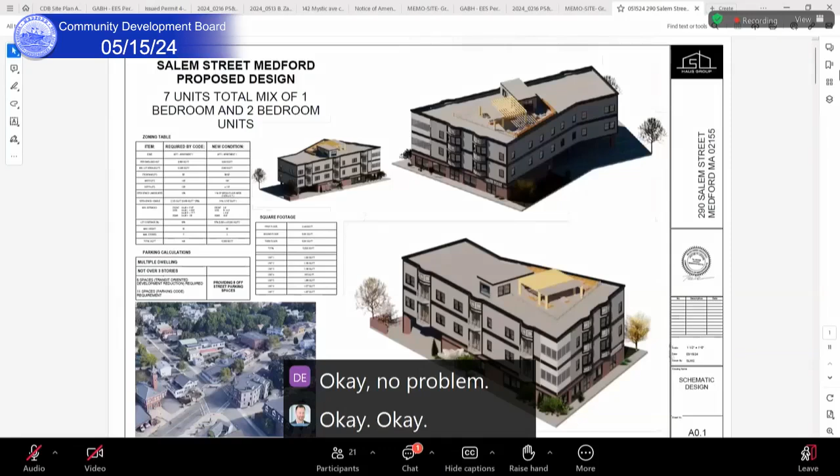Okay, thank you, Madam Chair and everybody. This is Jacob Levine, the architect from SL Haus Group. I apologize that I can't share the screen myself tonight. I'm kind of on the move, but I've been working digitally with the city to revise this drawing set and really specifically looking at the top left corner and studying how we could do a better job of grounding the building, along with just trying to unify the facades. So if you wouldn't mind just kind of starting to scroll down through the images, I can share what's been updated.

Starting really with the site plan has been updated. On the top left corner, you'll see a black 90-degree shape. Essentially, we're going to propose about a 4-foot barrier to shield the cars from Park Street, so those coming down Park Street won't have such an open view of the cars. That's represented in the top left corner adjacent to the sidewalk and the parking spots. Exactly. The parking has been revised a little bit to really fit underneath the building better in terms of the cars closest to the building. We also revised the footprint of the building, which we'll get into as we continue to move through this presentation.

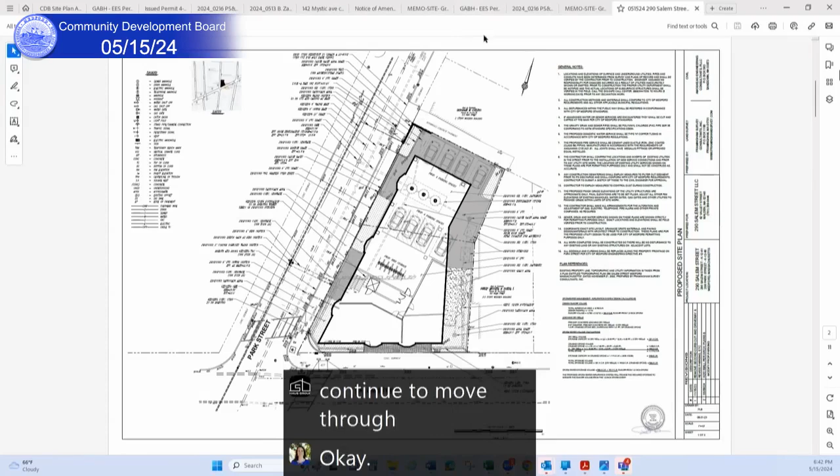So if you wouldn't mind just kind of going to the landscape slide. Yep.

On the landscape slide, you could see that corner in the top left to shield the parking. We improved the landscape on the Park Street side, and we pulled the wall, which you'll see in the architectural prints, to cover bike storage and those cars closest to the building. So the building has more of a portal now instead of being up on stilts in the background. All of our drawings now match in terms of site layout, site configuration, and landscape plan.

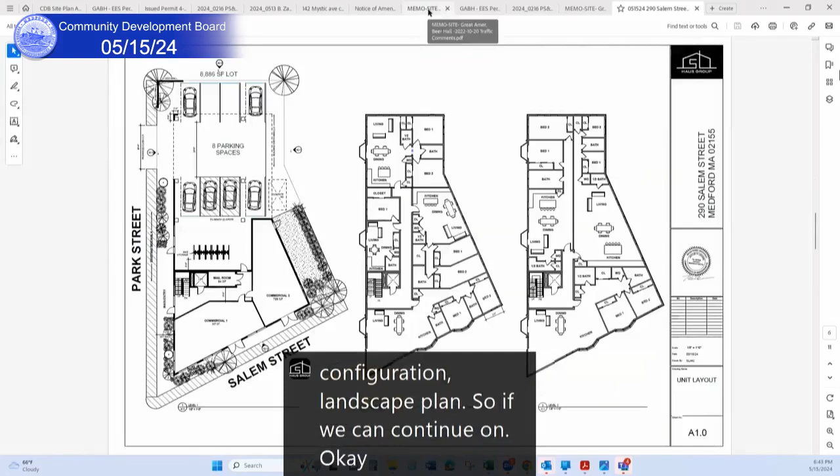Now you can see on the left side where we have the row of parking and the bike storage, that black line on the left with the door did not exist before. So we really did create more of an entry. And if you look at the car in the top left corner, there's a small 3x2 bite there. That's going to hide the column and do a better job at bringing the building down to scale, which I'll show you in the elevations and 3D images that are coming.

We could continue on. Nothing changed here.

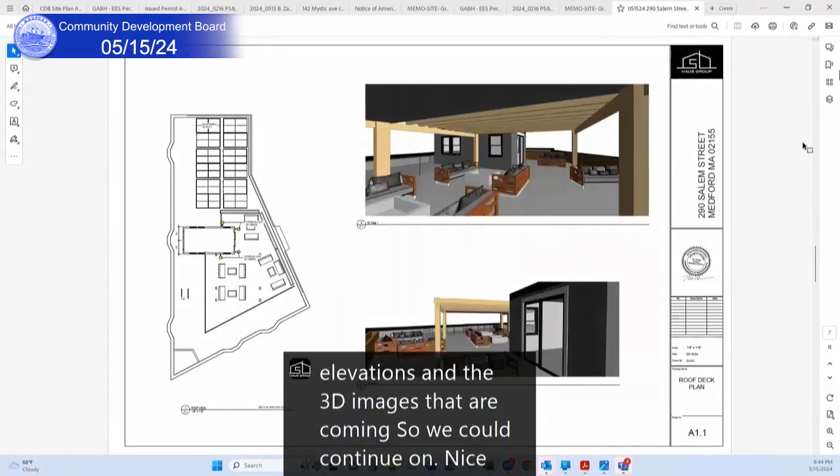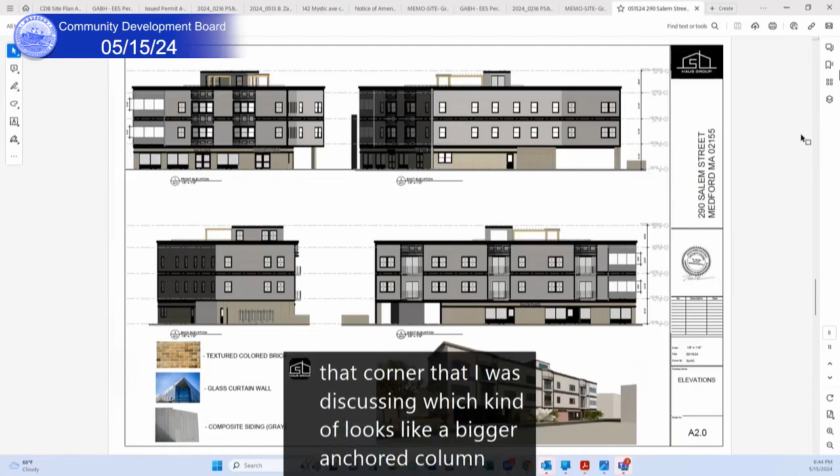On the elevations, we're looking now at the 3D image on the bottom right and the elevation bottom right. You can see how I brought the fascia board that was below the second floor down across the lowest floor to really create that portal. You can see the 4-foot brick or stone fence covering the parking, and the corner I was discussing, which looks like a bigger anchored column, and the upgraded wall to cover the bike storage as well. So that whole facade now covers most of the bike storage for security reasons, and the parking is mostly shielded coming down Park Street.

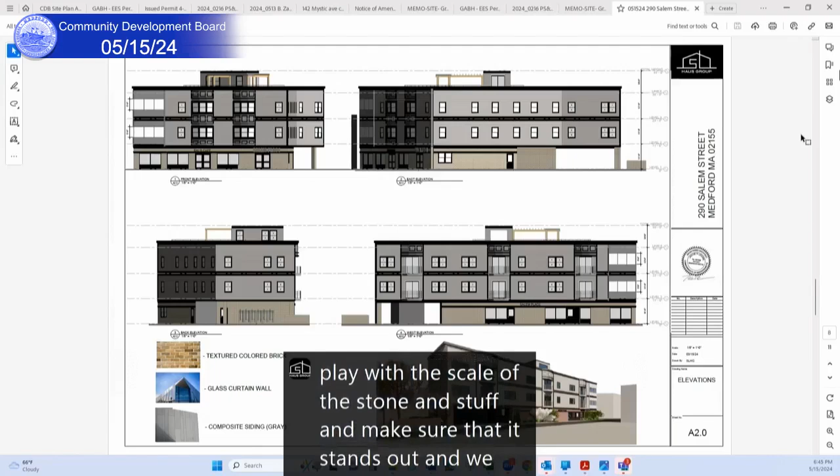I'm fairly confident we did a good job not blocking any views coming out. I think we want to play with the scale of the stone to make sure it stands out, and still have some sort of signage so pedestrians know what's to come.

If you could just go to my last slide. Oh, that one hasn't changed.

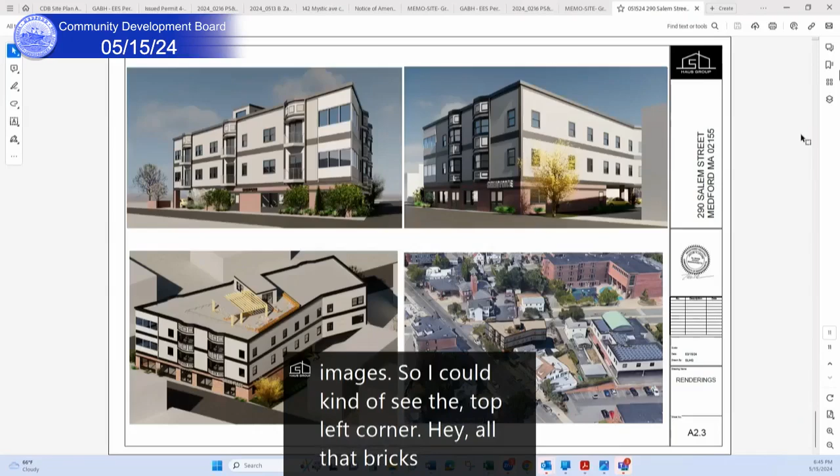Just wanted to show the 3D images. Now you can see the top left corner image - all of that brickscape and that double storefront in the back is all new. And you can see the column enclosure in that back left corner, and again our small 4-foot fence.

We're confident a driver would be able to see over that fence, have a safe pull out and still have a safe pull in, and really try to do a better job at what everyone's been asking for, which is the massing and the grounding to the site itself. So those are our upgrades.

The floor plans themselves didn't change. How the building sits on the site didn't change. We've just been working with the town on looking at that corner.

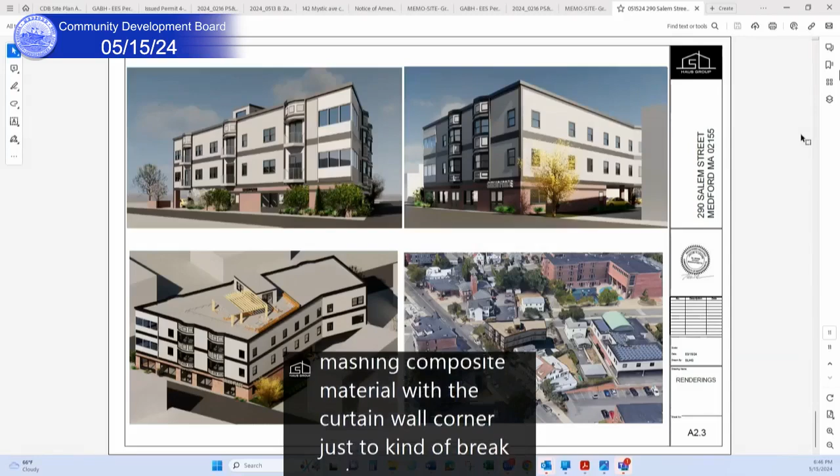You could also see in this top left corner shot, looking at maybe where the balconies are, we're doing a matching composite material with the curtain wall corner, just to break up that all-gray massing when it's all time. I wanted to point that out too - that was a good recommendation by the city, and I really appreciate everything.

Any questions anyone has, we'll be happy to answer.

Thank you very much, Jacob.

Before I open up to the board, I just want to commend you guys - the differences between the first plans and these plans are significant. It may not be 100% right, but it's also at the point where we can see how much you've worked with the city to move forward. And I, for one, can appreciate that, especially with that curtain wall corner that we were concerned with privacy on, and the whole idea of how an actual passerby will see the space. So I can appreciate that.

I will open it up to the board for any other questions or concerns.

No questions or concerns? No follow-up questions? Does the plan address overall concerns for the board?

Hey, Jackie, I have my hand up. Oh, sorry. Hi, Emily, Vice Chair Hedman.

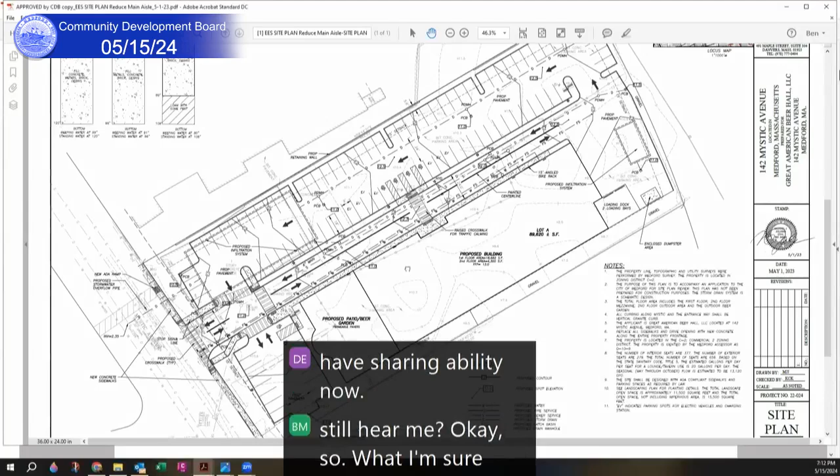Great, thank you. This is Ben Minix with Eaglebrook Engineering. Danielle, if I could please share my screen, I'd like to go over the two site plans. I believe you should have sharing ability now. There we go, can you still hear me? Yes. Okay, so what I'm showing here is the site plan previously approved.

I'll just show this quickly so you can see some comparison with the new proposal. So this is the building, which is still proposed in the same location, approximately 18,000 square foot footprint, with a proposed patio in this area here towards the south. And through the middle of the site with the driveway that was not approved is a two-way in and out driveway, and then parking along the north sideline of the property.

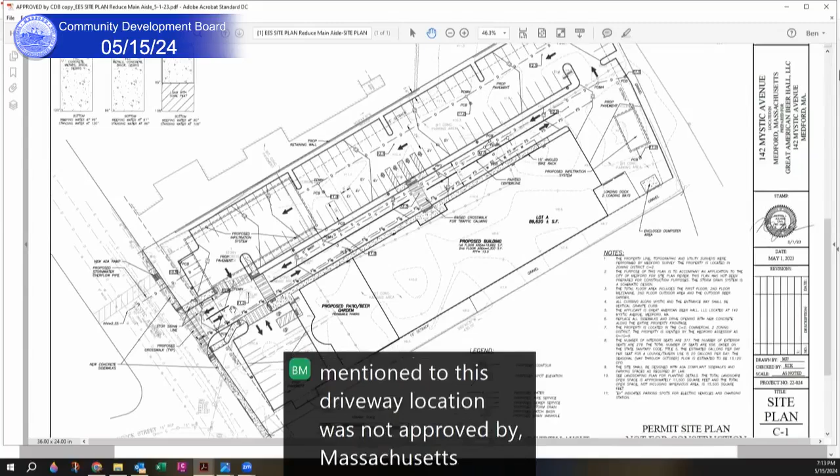As Danielle mentioned, this driveway location was not approved by Massachusetts Department of Transportation, so we had to go back to the drawing board with a location that DOT suggested and did finally approve. So I'll go to the current proposal, and if you have any questions, I can always jump back to this.

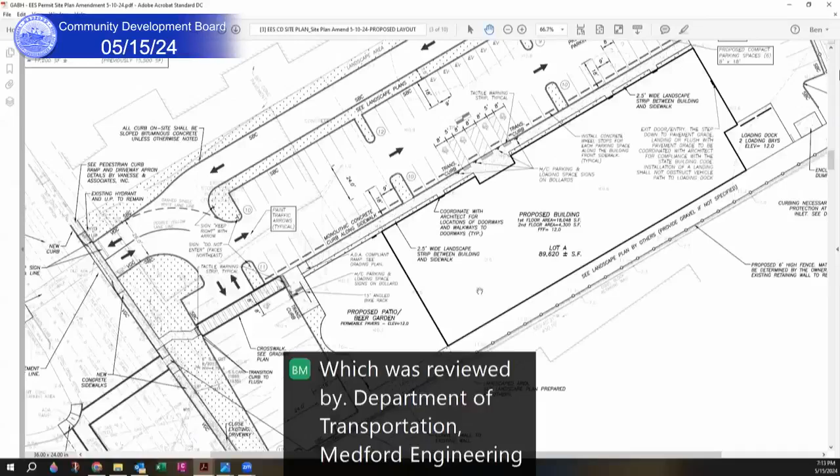This is the current proposal, reviewed by the Department of Transportation and Medford Engineering, and circulated among departments for agreement. The building remains in the same location. However, the driveway entrance, a two-way entrance and exit, has moved north on Mystic Avenue. There's one-way circulation through the site, with a 24-foot wide drive aisle, still one way, but with parking on both sides. Vehicles will exit around the north, drive south on the exit drive aisle, and exit at the driveway entrance.

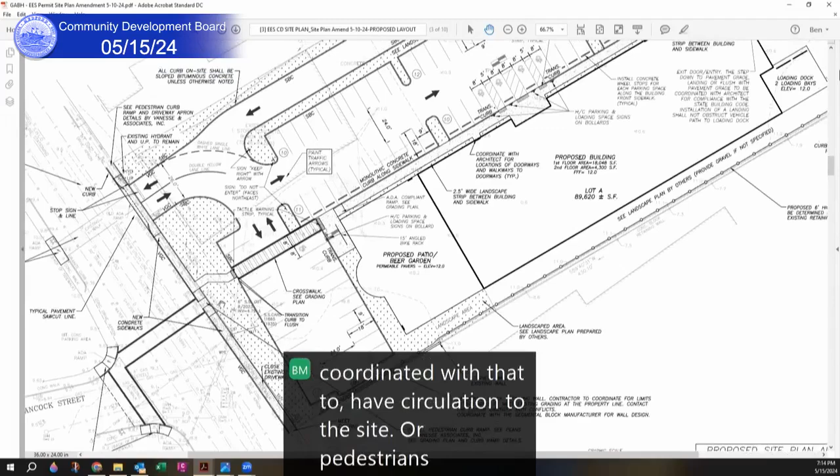DOT wanted crosswalks replaced and moved on Mystic Ave and across Hancock Street. We've coordinated with that to have circulation to the site for pedestrians from Mystic Ave and Hancock Street, so they can access via an ADA path to the building along the front and to the proposed patio area. We have additional landscaping with this proposal, approximately 1,100 square feet of additional landscaping and 1,700 square feet of open space, not including the open patio.

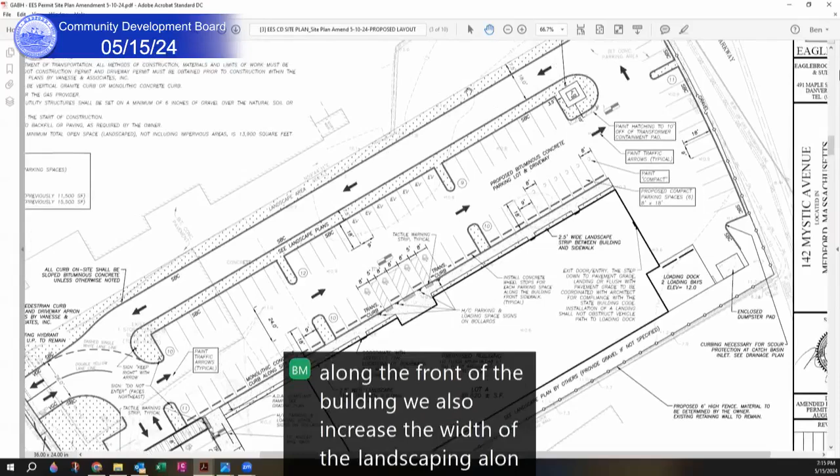In speaking with Danielle the last couple of weeks, it was suggested that we add a landscaped island here so there's no more than 20 parking spaces within a row along the front of the building. We also increased the width of the landscaping along the north side. Previously it was 5.6 feet of spacing; now we have 7.5 feet.

Mike or Brian, did I miss anything? Oh, that's great.

This is Mike Giuliano with Eaglebrook. The number of parking spaces, as far as what was previously approved versus what is currently proposed, is the same.

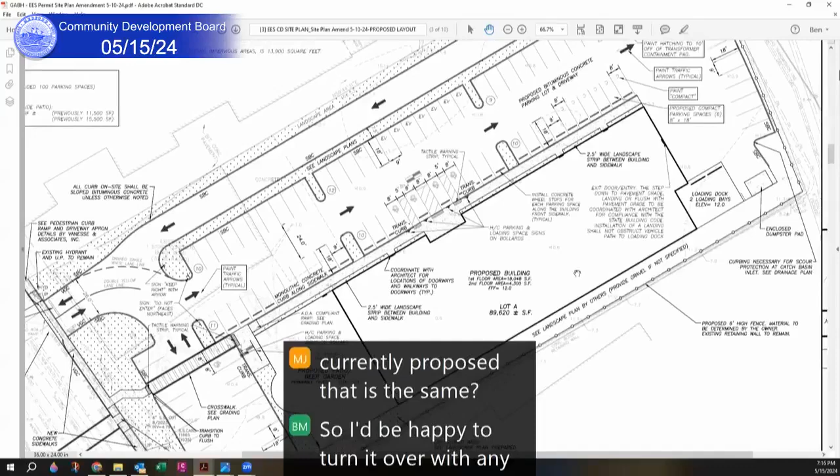I'd be happy to turn it over for any questions, or if you want to see additional sheets or anything.

Although we saw this a while ago, this came in so late that I have not wrapped my head around the differences. It would help me, just to speed this along, to have more time—not to act in haste. I don't want to do anything in haste, but I need to be able to wrap my head around this. Can you please compare the changes? I need to better understand what these changes are.

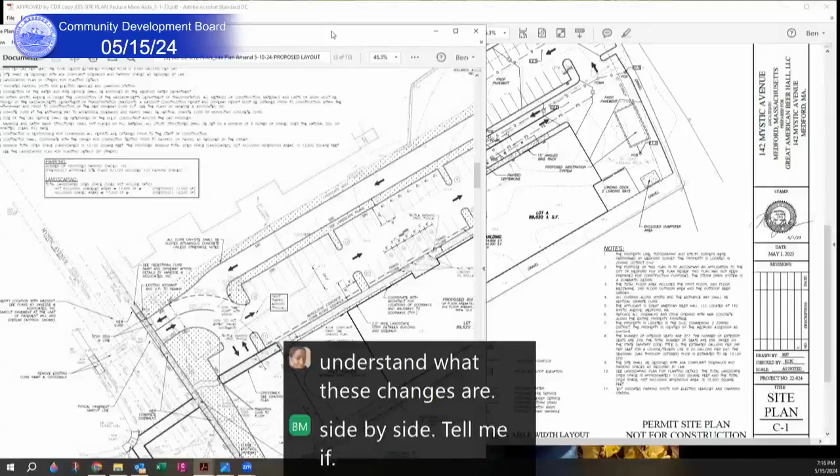Sure, if I put them side by side, tell me if you can see it or if you can't. Maybe it'll be too small, but I'll give it a shot. Are you able to see two site plans now? Yes.

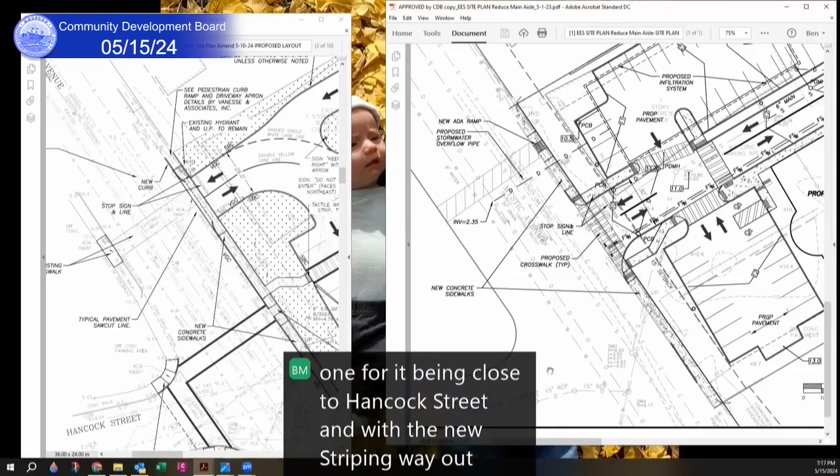We'll start with the driveway entrance, and you can see the location in reference to Hancock Street across the way. Previously the driveway was proposed a little closer to Hancock Street. DOT did not want that location, both for being closer to Hancock Street and because of the new striping layout and traffic controls going in on Mystic Ave. So the driveway was proposed farther north, farther away from Hancock Street.

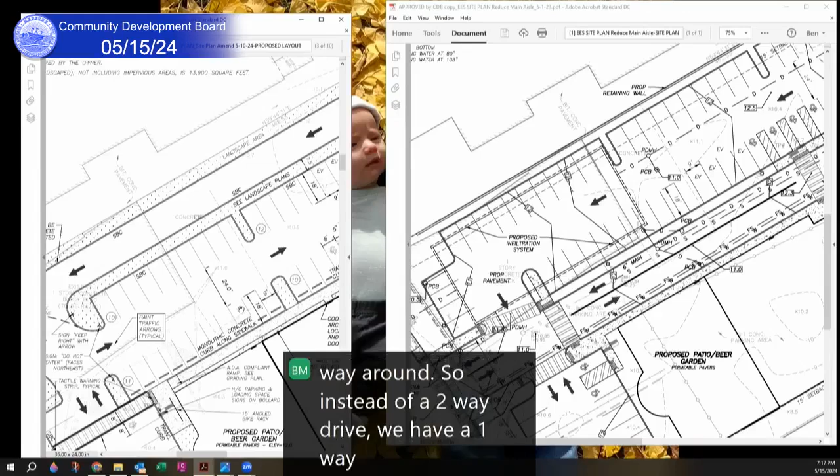Going into the site, the parking layout has almost flipped 180 degrees. Instead of parking opposite the drive aisle, now we're parking along the building with a one-way drive aisle all the way around. So instead of a two-way drive aisle, we have a one-way drive aisle all around the site, and we also provide greater width on the north sideline of the property. Those are the major changes. Again, 100 parking spaces for both the previous layout and the current one.

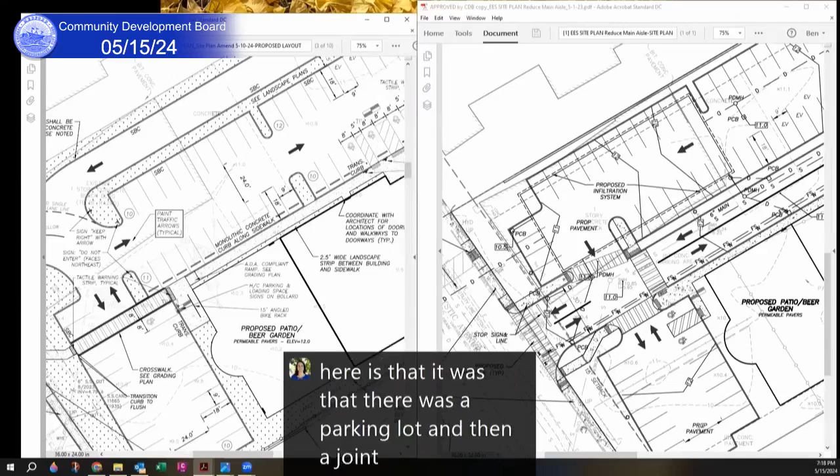Thank you. Director Hunt: I'm wondering, since Mr. Minix is presenting this from an engineering perspective, if I could explain from a layman's perspective what we're seeing here. There was a parking lot and then a drive aisle between the parking lot and the building, like a road, and everybody who parked had to cross that. The change in this layout now means that approximately half the spaces will actually be up against the building—not exactly, there'll be a sidewalk and a buffer—but everybody who parks on that side will not have to cross either the parking lot or any drive lanes. They can get out of their car and walk right up onto the sidewalk next to the building.

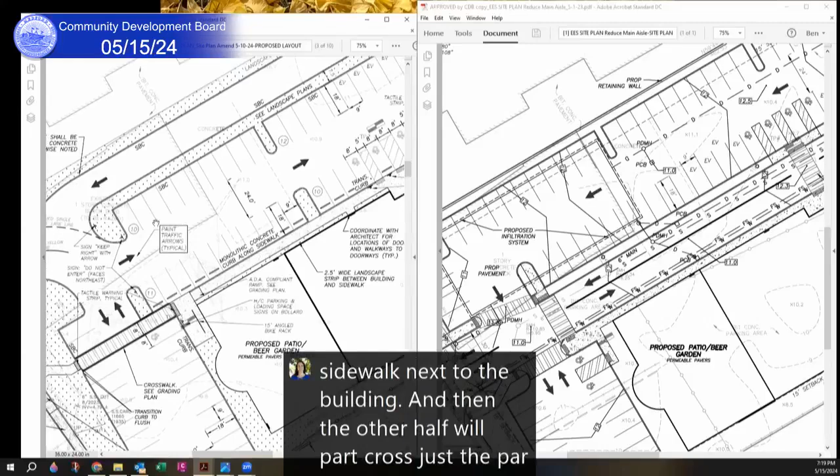The other half will cross just the parking lot. The through drive lane, where people are likely to drive faster since it's a straight shot through with no parking, is actually up against the edge of the property, and there's no reason for anybody to ever be walking over there because it's just a drive aisle. So we were looking at it in the office as this being actually safer and more pedestrian-friendly, because the parking lot is closer to the building and the one-way drive aisle is further away.

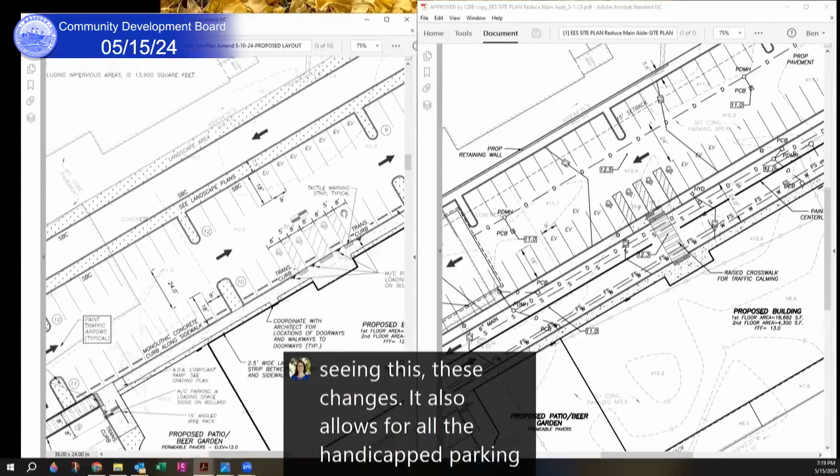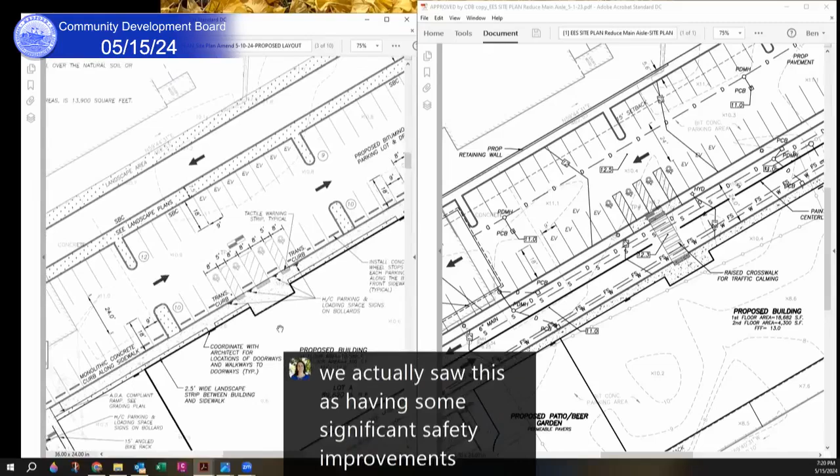I know I've put some opinion into that, but that's how we were seeing these changes. It also allows for all the handicap parking to be right up along the building area, so anybody having mobility issues can get out of their vehicles and right up onto the sidewalk. We saw this as having some significant safety improvements for the layout. DOT is kind of making them do this, and honestly I didn't like that DOT was making them change what we'd already approved, but once I saw their new layout, I was able to get over that.

Madam Chair, if I may, I just want to concur. When I first saw it, I thought, oh gosh, it changed, oh no. But then opening it up, I actually like this better.

The only bugger is that the permit MassDOT gave is restricting the left turn out. I don't know if that was mentioned yet. I'm trying to figure out egress and it's kind of hard. That's the one thing — what's the egress situation?

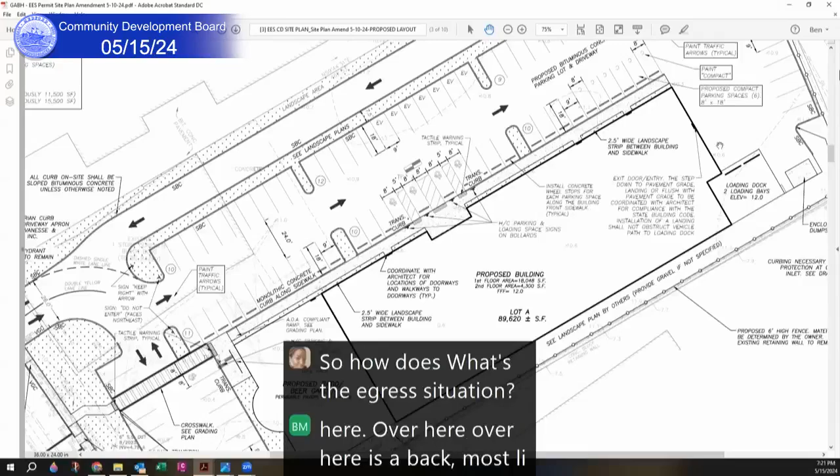So this is the main entrance to the building. We have another door here, and over here is a back, most likely worker entrance. There are also doors along the patio. We have a sidewalk going all along the building, with a sidewalk and bike rack, and ADA access through to the Mystic Ave sidewalk.

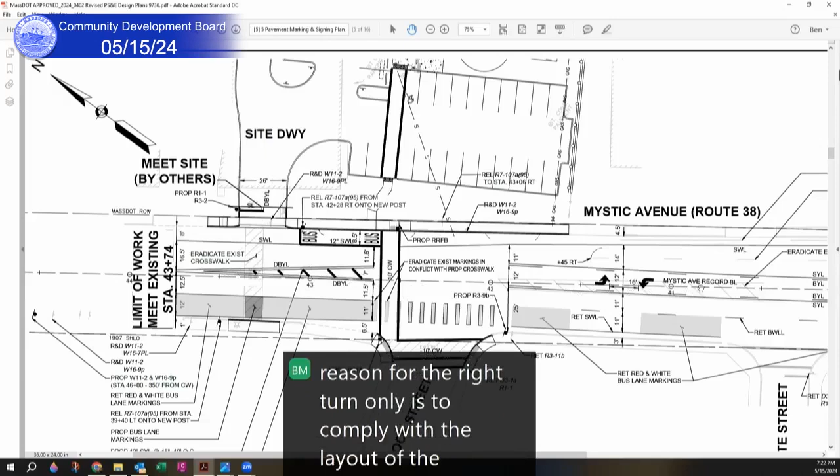As far as the right turn only out of here, I'll show the approved DOT plans. Along with the site improvements, DOT is requiring additional striping and paving on Mystic Ave. I believe the reason for the right turn only is to comply with the layout of the striping and traffic flow on Mystic Ave — they have a double yellow line and hatching there, so you'd have to take a right out of the site.

Not because it's in the same family, but Danielle, if I'm not mistaken, is Atlas built the same — right turn only, correct? When you come out, are you? I'll defer to Director Blake on what the permit access is for next door.

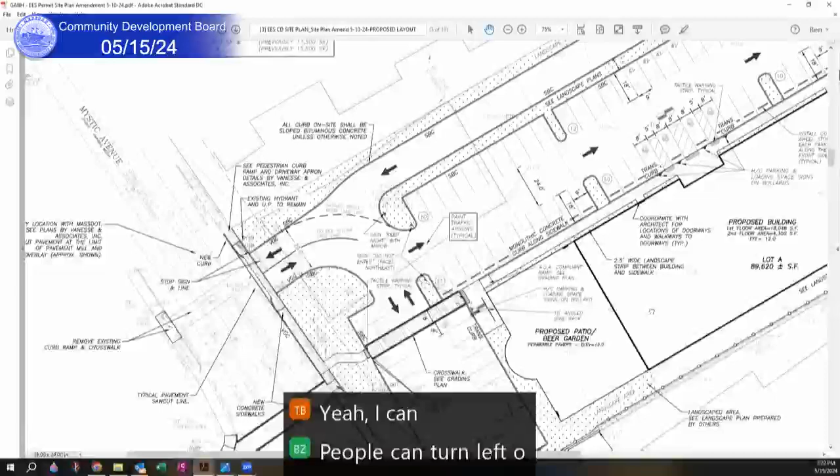People can turn left out of Atlas, yes. I can't recall if there's... I do want to point out, in addition to what Danielle said, the permit for MassDOT also restricts left turns in. So essentially it's only right out and only right in — that's the permit language. My take is that it's because of that striping and traffic pattern they have throughout the middle of Mystic Avenue.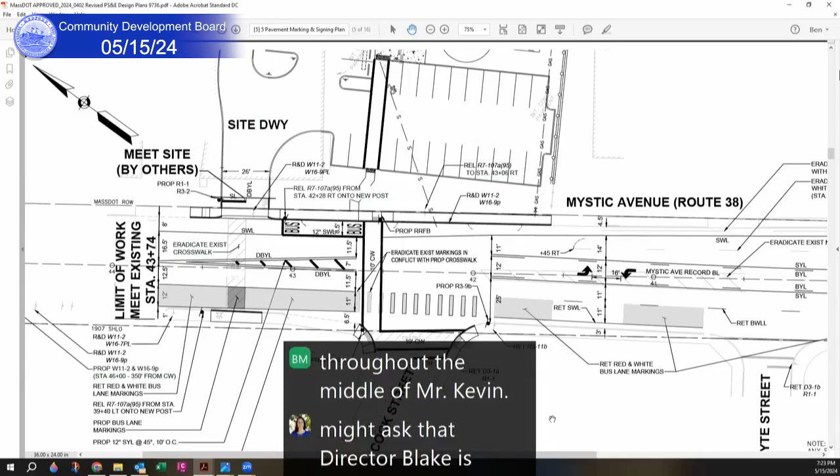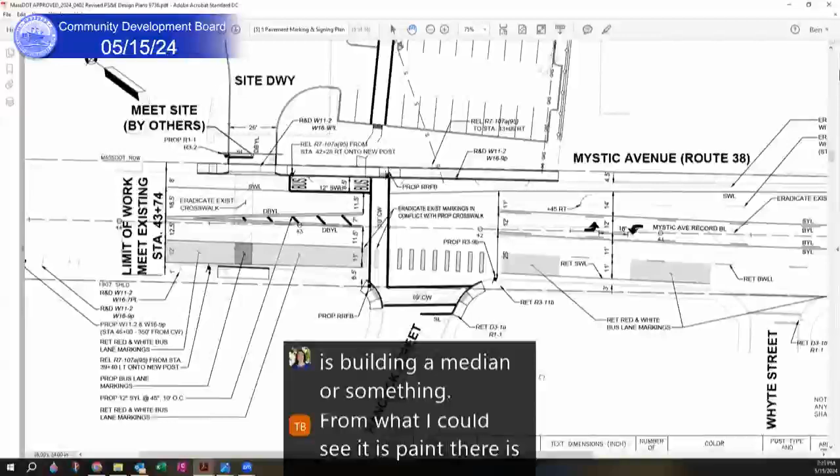Madam Chair, if I might ask Director Blake — is there any chance we're going to have any influence over that? From an economic development and city perspective, I don't like it, and we didn't even know this was happening in our office. I do know that at this time, it's all paint, right? It's not like anybody is building a median. From what I could see, it is paint. There is a sign on the property, R3-2, indicating no left turn out. It doesn't appear there's a no left turn in sign.

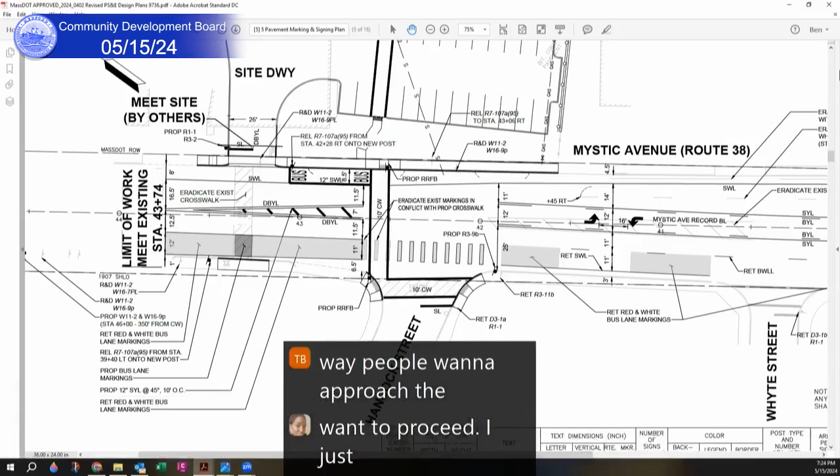I didn't know if we want to delve into the traffic piece here or continue with the site and the improvements shown on this plan first, however which way people want to approach that. Sorry, I got held up, I was looking at the transportation, so you can however you want to proceed. I just wanted to ask some clarifying questions I had to wrap my head around.

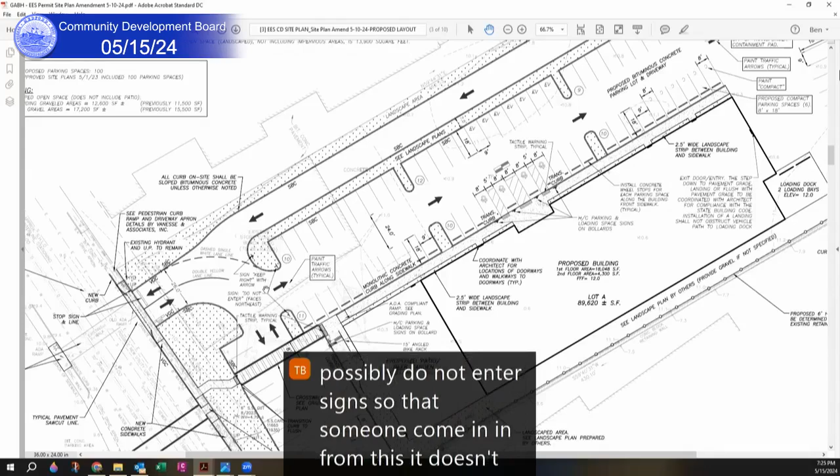Okay, so basically I tend to agree with Alicia and Danielle in my professional opinion for the city, for the site layout itself — it's equal or a little better than the previous, probably. So that's a good side effect of these changes. There were a couple of very minor things: at the exit where the two arrows are in and out to the dead end parking area, there should probably be a stop sign and stop line. And then at the exit from the one-way drive, same thing — stop line, stop sign, and possibly do not enter signs, so someone coming in from Mystic doesn't accidentally go left of the island, even though there is a keep right. Those are just minor signage things.

That makes sense — so then the people exiting would stop and kind of yield to anyone coming in from the main drive.

So that's for the site. Everything else Danielle and Alicia said, I agree with.

So off-site, we could probably go back to the MassDOT page. They likely added those restrictions. I can't speak for them, but it's probably a safety concern they had for the turning restrictions, but it does have impacts to the city for other things.

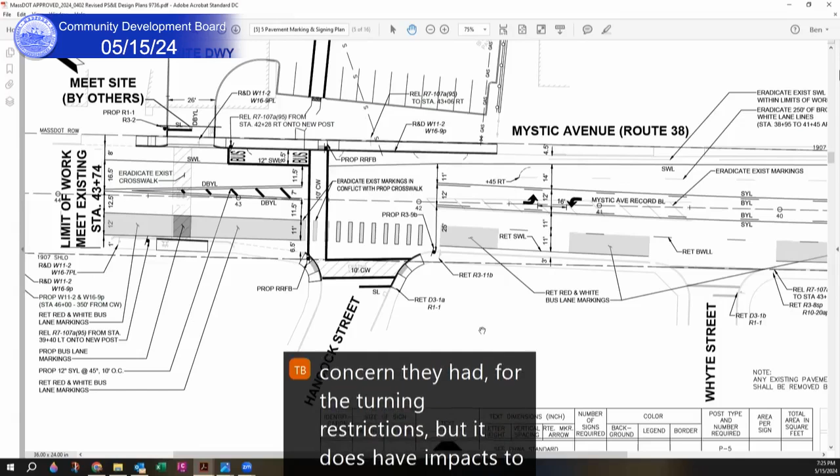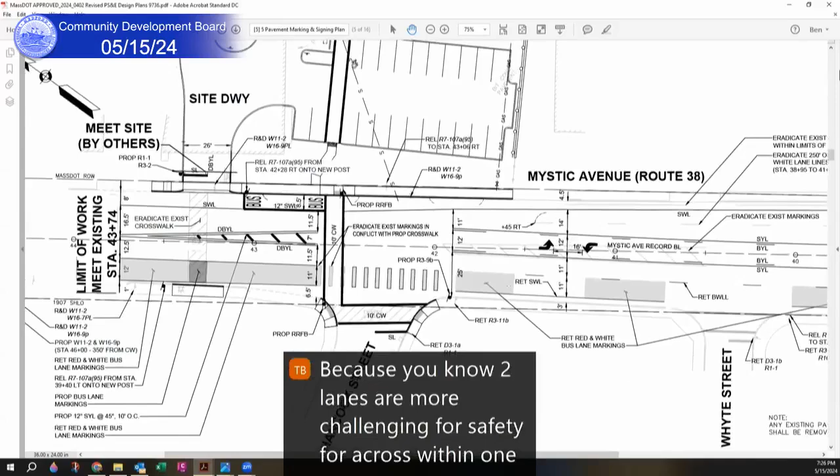Briefly, I'll talk about the plan shown here, all the markings. It looks like MassDOT agreed with my suggestion in one of the conditions to drop the second lane on Mystic Ave northbound before reaching Hancock Street. So by the time a vehicle reaches Hancock Street, especially the crosswalk, they're already in a single lane northbound instead of two, because two lanes are more challenging for safety for a crosswalk than one. We get more compliance with one lane for people yielding.

I'd note on this plan it does show the proposed RRFBs for the crosswalk, which was in my original condition recommendations but wasn't part of the original approval, but MassDOT apparently required that as well. So one on each side of the street, so that's good.

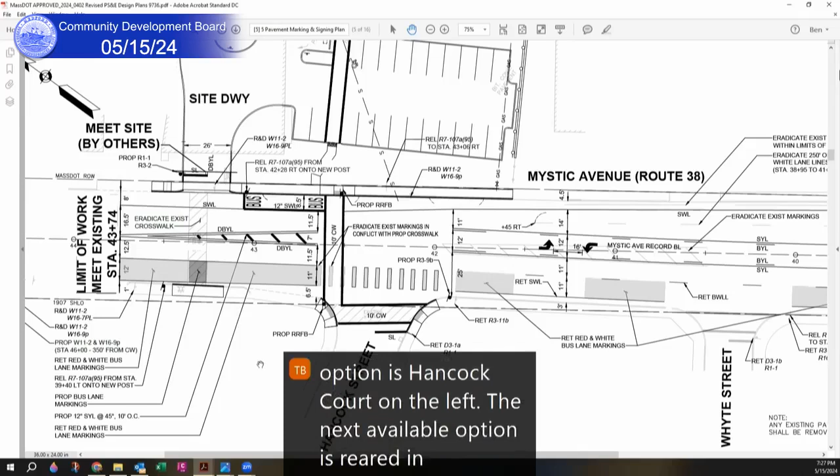So the downside is, because of those restrictions, it's pushing all the entries and exits to a particular side of Mystic Ave, north or south. When people exit the driveway, instead of taking a left if they're destined south toward Somerville or points south, they'll have to go right onto Mystic Ave North. The first available option is Hancock Court on the left. The next is Reardon Road on the right, to do a big jug handle and circle back south.

And the way directions work, because those two streets are private ways and don't typically offer that routing, directions will send people all the way up to Main Street where the police station is, to take a right onto 16 and do a jug handle back to Mystic Ave. That's the complication with this restriction. It really adds a lot of unnecessary vehicle miles and puts people into an area near the fire and police station, which is already heavily traveled.

Same thing coming southbound. If you can't take a left in and people obey that legally, they might come down from the north heading south on Mystic Ave and take a right on Hancock Court to hit Hancock Ave and Hancock Street, circle around and come out Hancock to go in the proper way. So it really changes the dynamics of the whole entry and exit to this site.

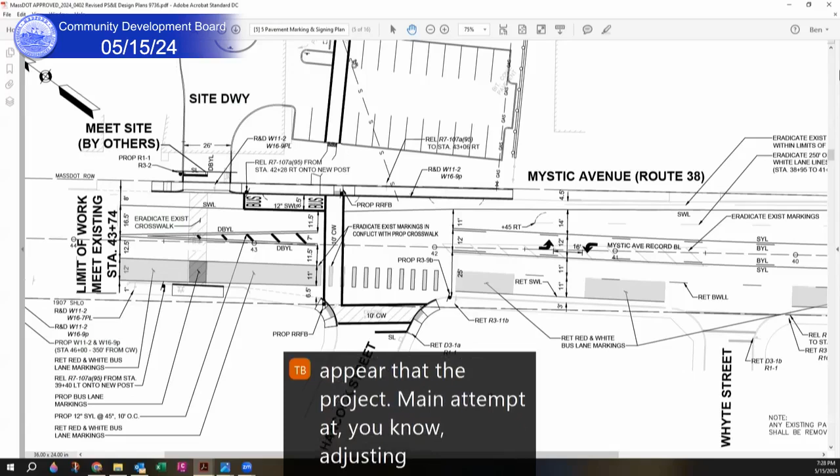It doesn't appear, from the information provided, that the project made an attempt to adjust the traffic study to explain what the impacts may be. So I'm trying to highlight what I think they could be. I think Hancock Court and Hancock Ave could see impacts from this restriction, and possibly Reardon Road. If not either of those, the Main Street corridor up near Main itself would see additional traffic it didn't necessarily need.

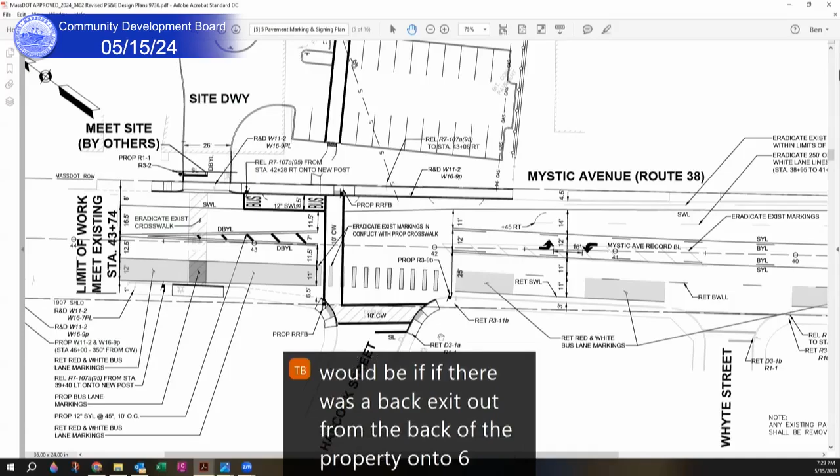One potential way to alleviate some of this would be if there was a back exit from the property onto Route 16, but that would require an access permit request to MassDOT. That would enable right-in, right-out so people exiting could turn right southbound, and people coming from the north could turn right in. That would help alleviate the issue, but I couldn't speak to the likelihood of that permit. Still, it's one way to potentially address the ability for people visiting the site to travel south when exiting, or arrive from the north more directly.

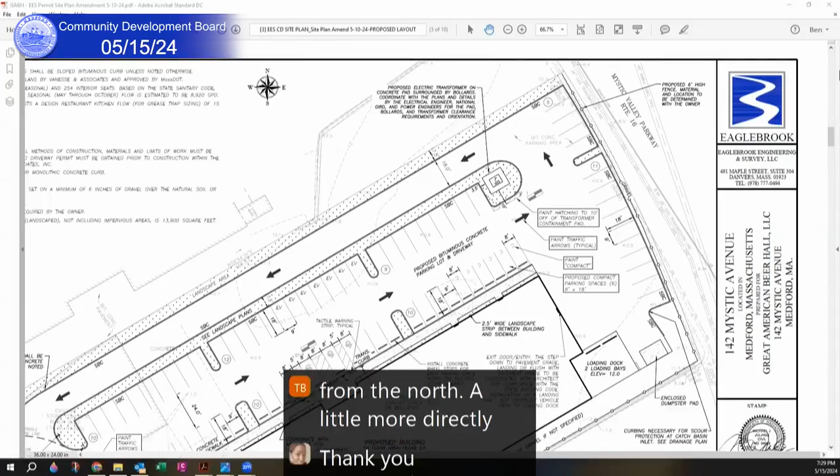Speaking with Danielle earlier, one concern I had with that option is that the back of Mystic Valley Parkway, Route 16, the way it merges with the exit on I-93, would put a lot of traffic spilling out at that traffic light coming onto Mystic Ave before you get there. It's just the way Mystic Valley Parkway is set up, period. It would introduce traffic to an already congested area that the DOT and we are already concerned about.

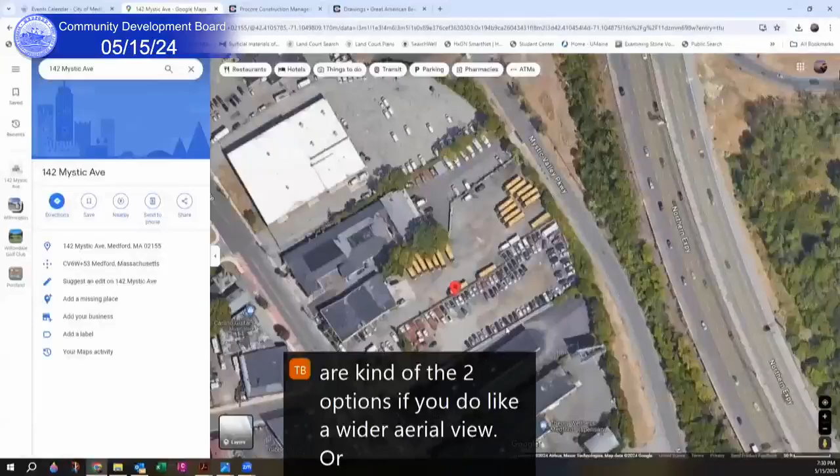But even without that driveway in the back, that's the way the directions will get someone north on Mystic Ave, turn right around the police station and come back south all the way down to that signal anyways. Or they'll circle left to Hancock Ave or left onto Main Street and come down through South Medford. So those are kind of the two options if you do a wider aerial view, like a 2,000-foot aerial view, you can see the options.

So if you go north up Mystic Ave, you could turn left onto Hancock Court, which is a private street, and then another left onto Hancock Ave, then a left onto Hancock Street would bring you back to where you would have been if you took a left out of the site.

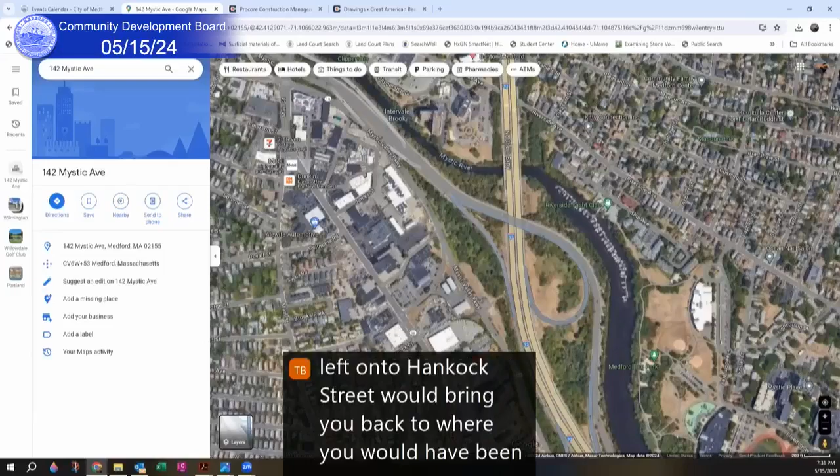And if you go all the way up and take a right on Reardon Road, which is essentially a private drive south of James Street, that would take you out to the backside of Mystic Valley Parkway. Or if you go up to the police station, same thing.

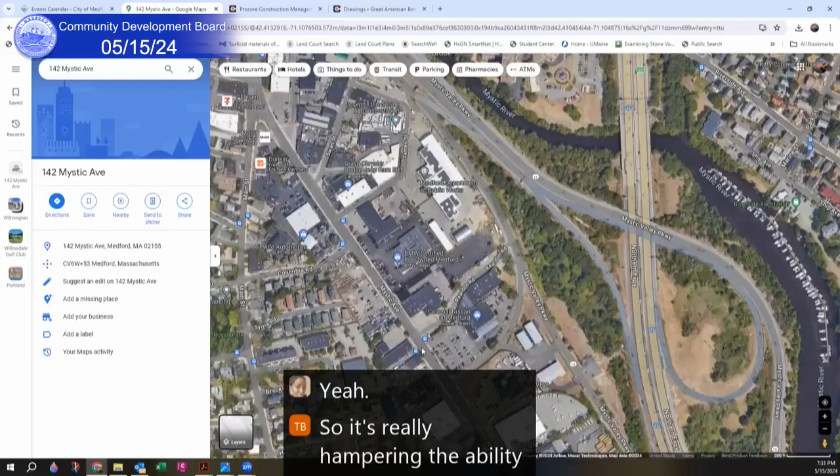So it's really hampering the ability of people to exit if they're destined south. And I think the traffic study mentioned that they thought 60% of the traffic was coming from and to the south. It's not the project's proposal, it was required of them. But we're just trying to talk about what the impacts may be to the community after the fact.

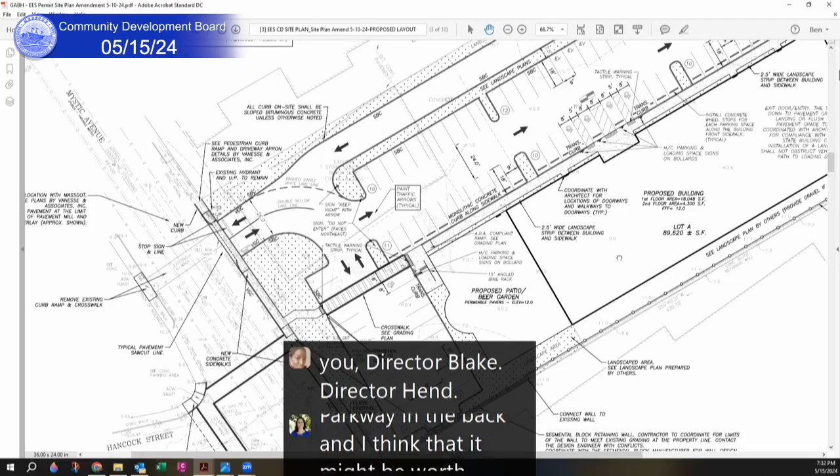I just wanted to add that I've been looking at these exits to the Mystic Valley Parkway in the back, and I think it might be worth it for some of the businesses to pursue in general, but I don't think it's a short-term solution. I don't think anybody's going to get a yes from DOT in months, it probably would take years. So I wouldn't try to even condition anything on it because of the lack of likelihood of it.

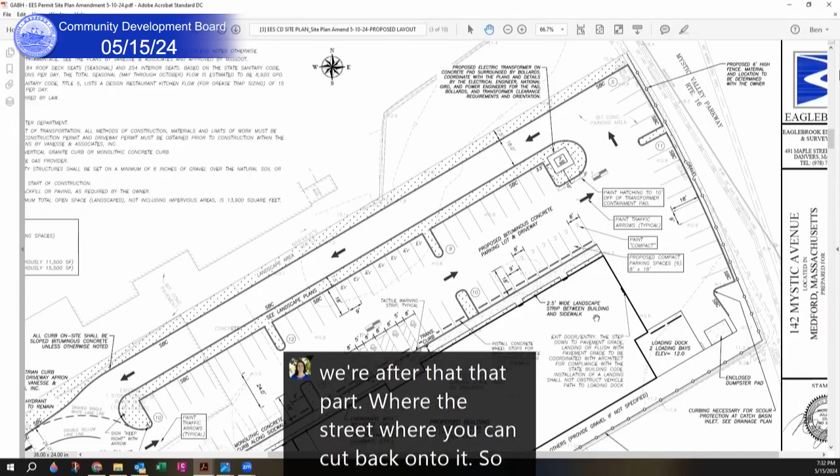But I do think it's a reasonable issue. I had thought before that there was another street that came back through onto Mystic Valley Parkway before Route 16, but you're right, we're past that part where the street lets you cut back onto it. So I just wanted to say that from the planning office we would support them and help them, but I don't think it's worth burdening a project with something so impossible, and it's not their fault that this was being pushed on them partway through construction.

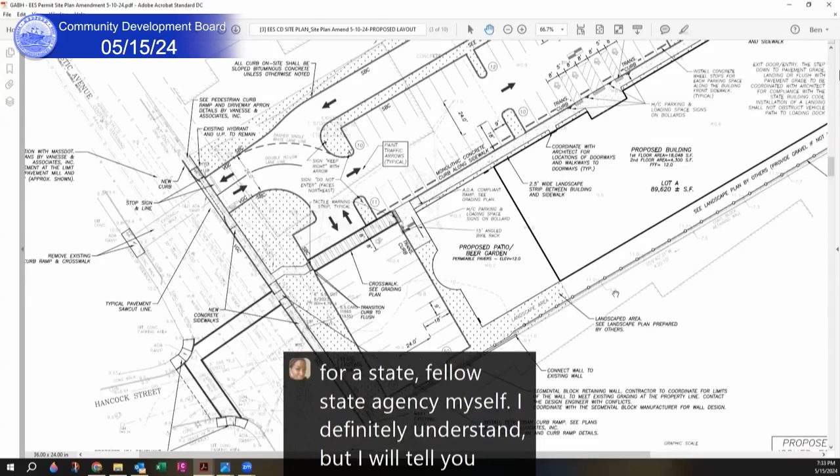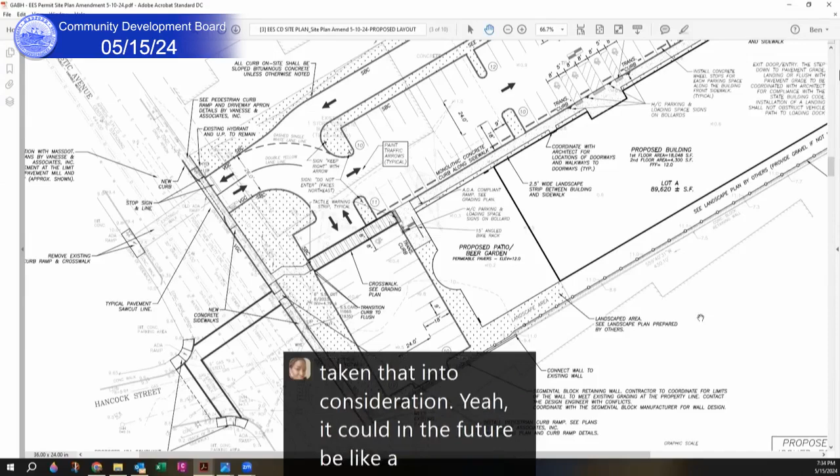And yeah, I appreciate that. I don't want to speak against the state because they're there for a reason, and working for a fellow state agency myself, I definitely understand. But I will tell you economically it could kill a project, unless the city is looking at a feasibility traffic study for the entire strip where others could actually come in and pay for the impacts. I can't even imagine what an access permit would do, not just adding cost but adding time to this project. I'm not sure how the proponent feels about that anyway, but in my experience, I know it could be cumbersome.

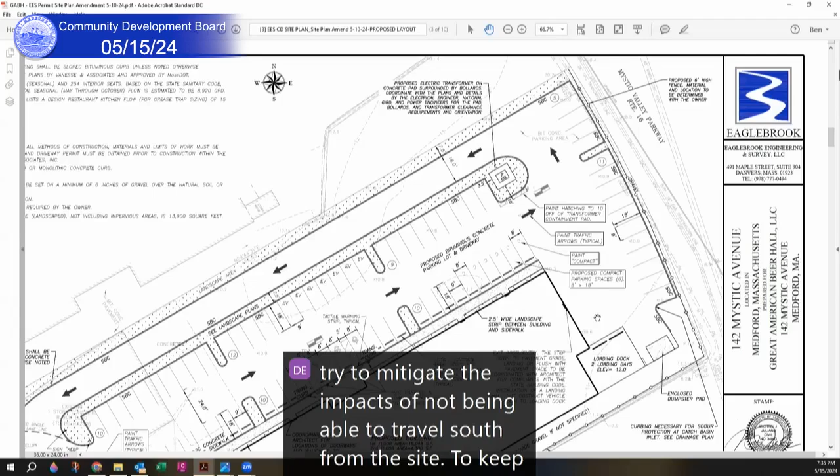To keep cars from speeding through, especially the Hancock Court area is one I'm concerned about - folks taking a right out and immediately banging a left into there and then flying through. Hancock Court is a private way, so I don't think we can do things unilaterally. There would have to be an agreement with those property owners if we wanted to put a speed hump in, or ask the applicant to put a speed hump in there to mitigate that.

I see Director Blake has his hand raised. Yeah, so just to go along with what Danielle was saying,

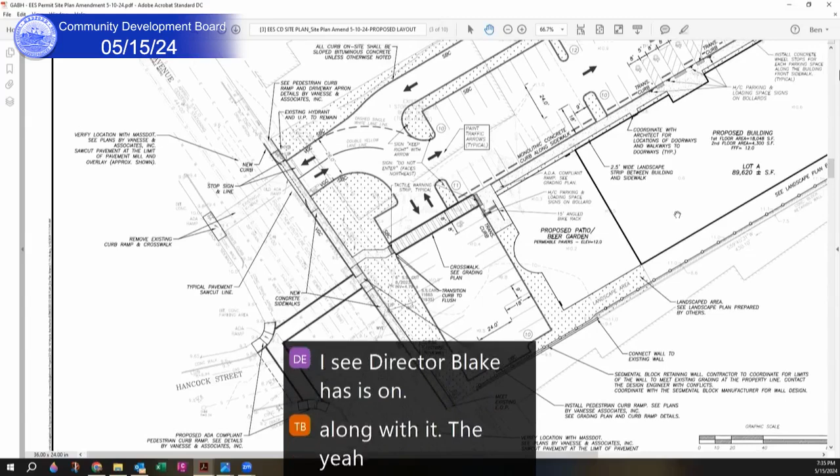there are ways to potentially mitigate negative impacts to Hancock Court or Redden Road or any of those private ways. Some of which could be a speed hump or something like that, or restricting access in the form of making those right-in, right-outs, whether it's with flex post or median or something like that. But again, because they're private ways, it would be subject to the private ways agreeing to those things. Could be determined at a later date or a certain value or something like that.

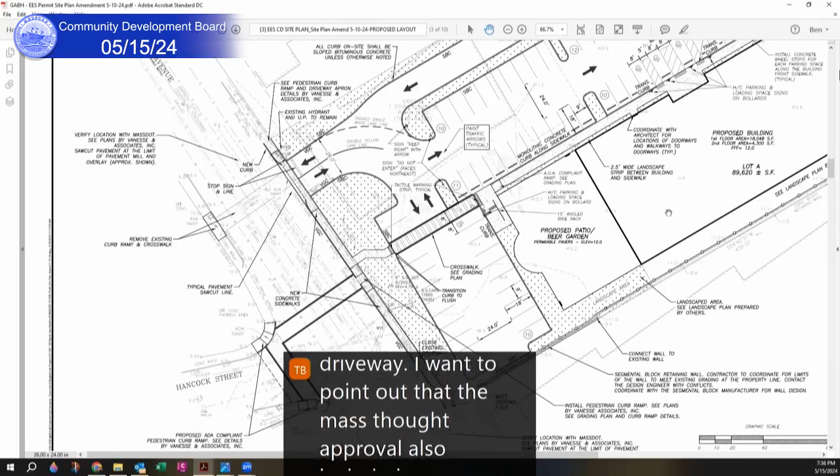But those do seem like the most immediate options for people to exit or enter from the way that's restricted from the driveway. I want to point out that the MassDOT approval also included retiming of the traffic signal at Harvard Street and Mystic Ave and Route 16, which is the one we were saying is congested. So obviously by MassDOT requiring them to retime that, they already think that signal system needs work, and the state and the city have already discussed those in the past unrelated to projects, how it needs some work down there.

But whether this project is, either way, this project would send traffic through at least that portion of that signal, because either they're traveling down Mystic Ave if the restriction wasn't in place and they'd go through that signal, or they'd go Mystic Valley Parkway in the backside and still end up going through that signal. But where the off ramp and 16 meet is definitely problematic.

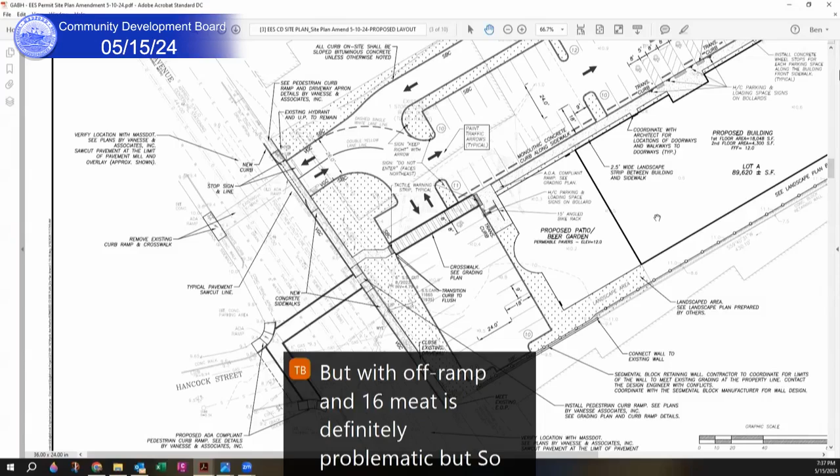It would be nice to try to come up with some way to mitigate the negative impacts to, say, Hancock Court and Hancock Ave, and possibly Redden Road too. But if we did so and those were successful, then the option leaving would go all the way back up to the police station area. So it's just a challenging situation that we're all put in right now with this. But we want it to make it work and be successful, without being an impact.

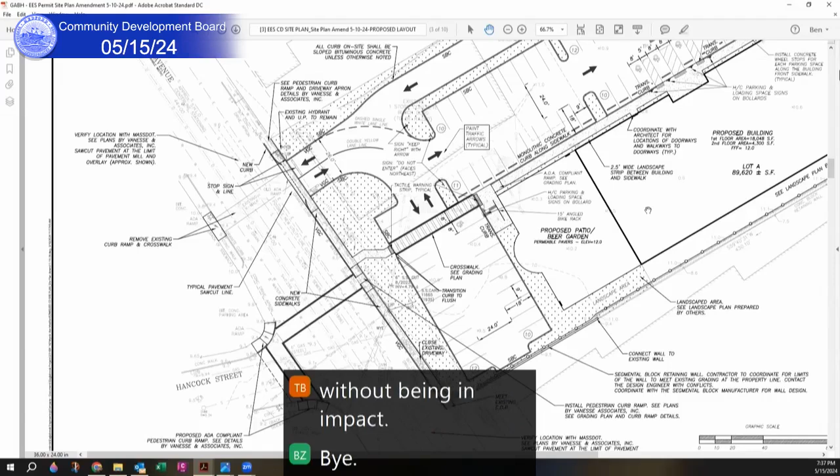If I may, I don't mind applying for access out the back, but I just don't want it to take it as a condition to hold me up on my CO. We're, I'd say, 70 to 75% through the project right now. We're set to open in July. But that was something I will do. It's just after just going through the Mass DOT process, it's timely.

No, Mr. Zarther, I myself, as just one board member, I wouldn't be comfortable conditioning that. Yeah, thank you.

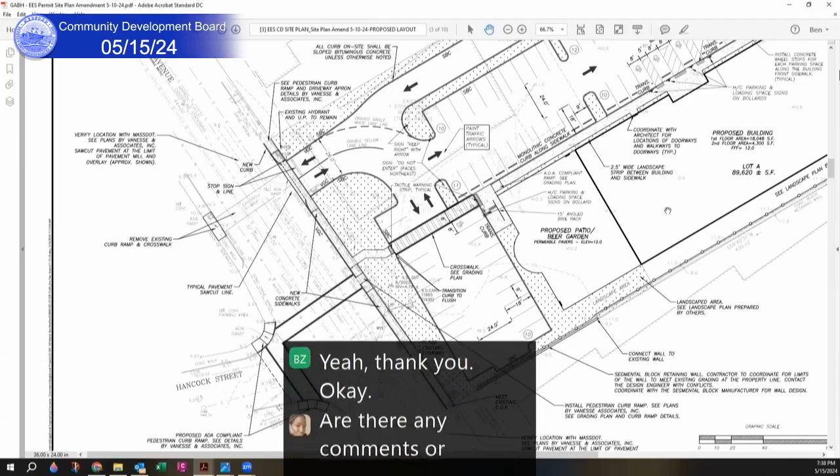Are there any comments or concerns from the board? Peter Cowles? Yes, I just wanted to kind of summarize the situation and give kind of what I saw as the short and long term.

I think it's still worth it in the long term to pursue the access permit on Route 1A, but I don't think that's, like we said, something to condition the whole project on at this moment. As Mr. Zarther pointed out, they're almost done with the project.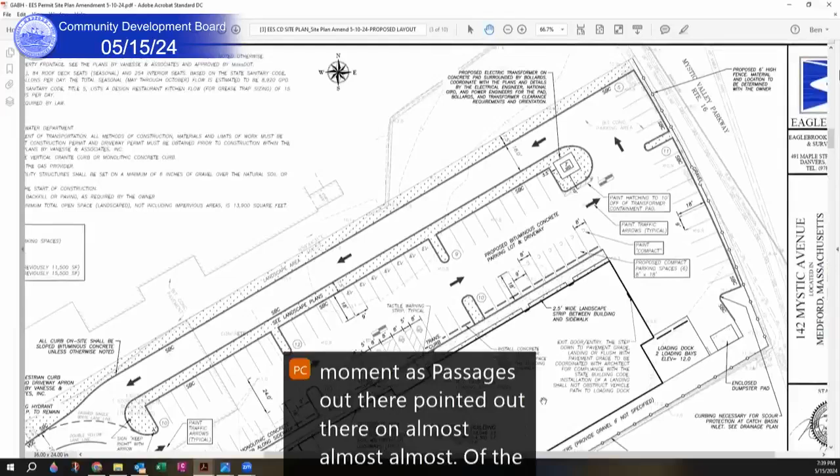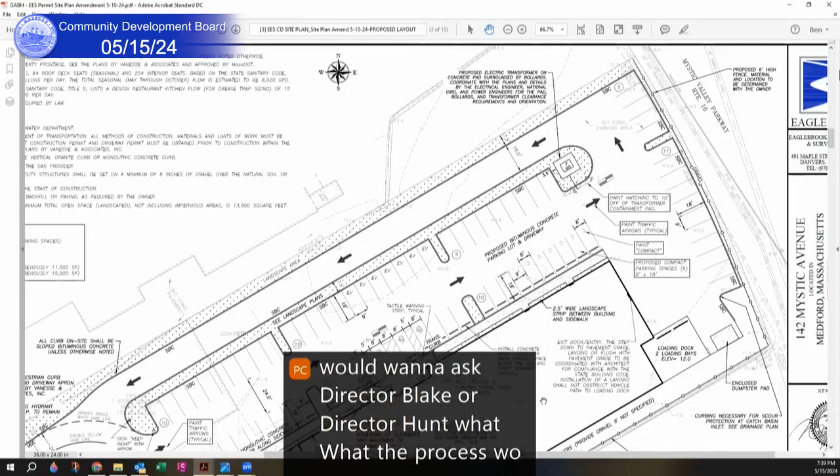So I do think in the short term, some kind of attempt to seek to do traffic calming on the side streets where traffic would be diverted is probably the best available mitigation in the short term. And I would want to ask Director Blake or Director Hunt what the process would be, because those are private ways, to get something in there.

It's a very good question. So there might be a way on public streets to address the Hancock issue, but it wouldn't necessarily be on Hancock Court itself. You could potentially put traffic calming in Hancock Ave, which Hancock Court, once you go down there, leads to Hancock Ave in both directions. So you could put a traffic calming device on a public street in either direction on Hancock Ave, potentially. That would be within the city's control.

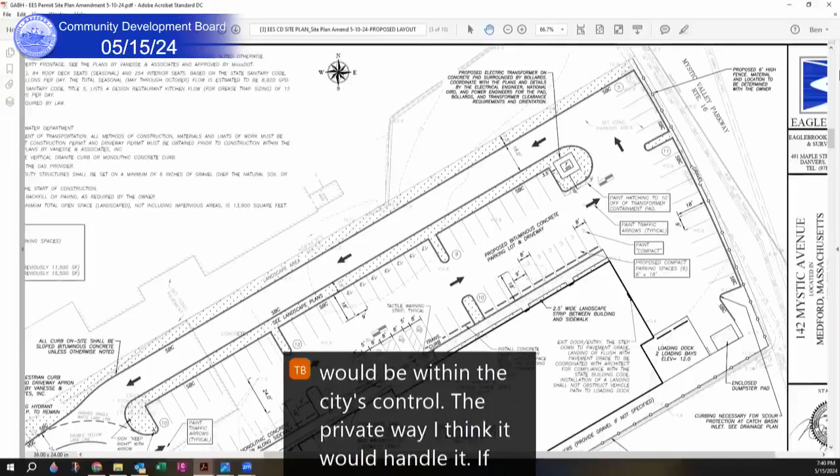The private way, I think it would handle it if there was a recommendation that was associated with this project this evening or some other time. You could condition something in the form of some traffic calming element subject to the approval of the rightful owners of the private way. Almost like a lot of times we suggest traffic calming on state roads, but we say subject to MassDOT. So it's subject to whoever has rights to make that decision on that road.

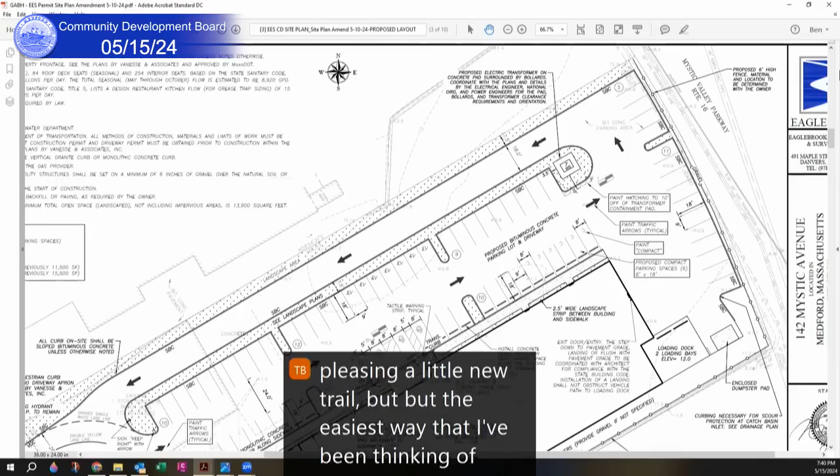It'll be kind of blazing a little new trail, but the easiest way I've been thinking of handling this would be in terms of time. I am cognizant of the whole discussion about the time of the project and delays. In my experience, being on the private or public side of previous developments, even though sometimes it's not preferred, sometimes it is preferred, money doesn't take any time. Offering money for a solution, set aside for that purpose to be determined at a later date, means you're not tied to a specific thing that has to be done before you open. So that's one way to handle it.

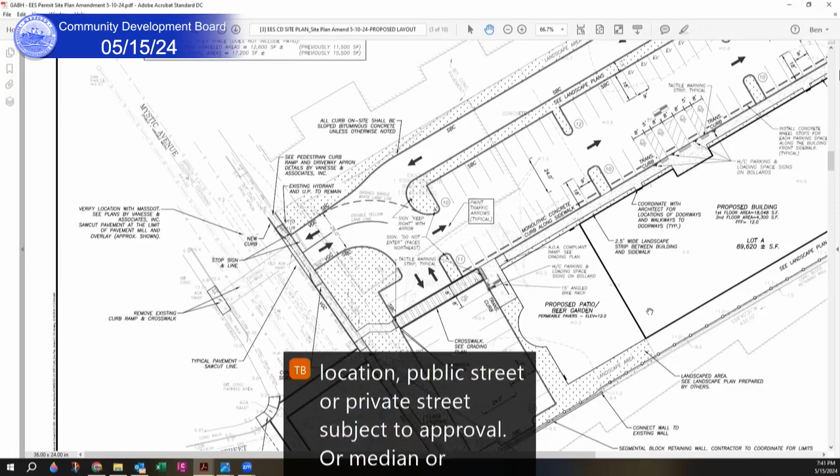But you could prescribe speed humps at this location, public street or private street, subject to approval, or a median or turn restriction at those locations, subject to their approval, or money in lieu of those types of improvements, some value. But yeah, that's the way I would go about doing it.

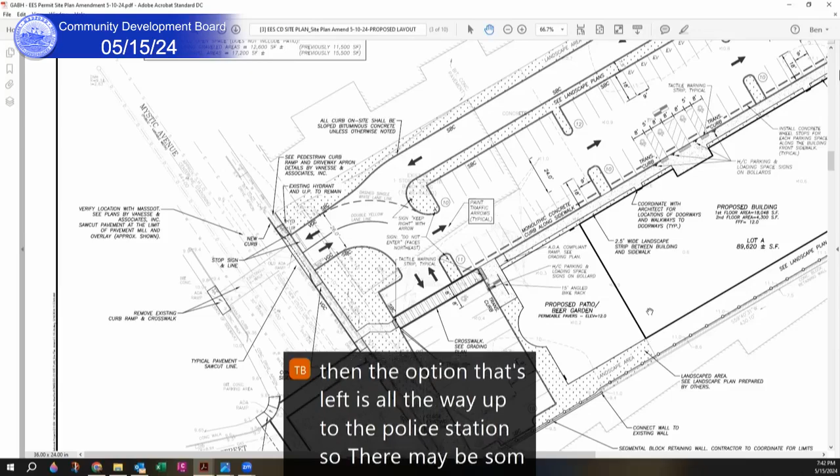If we're successful and we deter people from using those options, then the option that's left is all the way up to Main at the police station. There may be some that choose to illegally disobey those turn restrictions, and those would be subject to enforcement by the state police because it's on the state portion of Mystic Ave. We wouldn't advise that, because if there's an incident, you would be at fault. But these are kind of the limited options it seems like we have at this point.

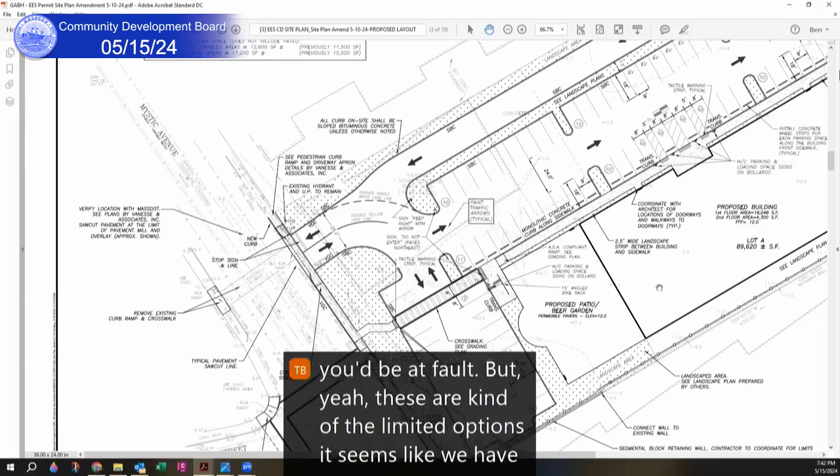If we had more time, what I'd normally suggest is for the traffic engineer for the project to study this and recommend something—study what they believe the impacts are based on their trip distribution and what their recommendation would be. But in the interest of time, we're trying to shortcut that process.

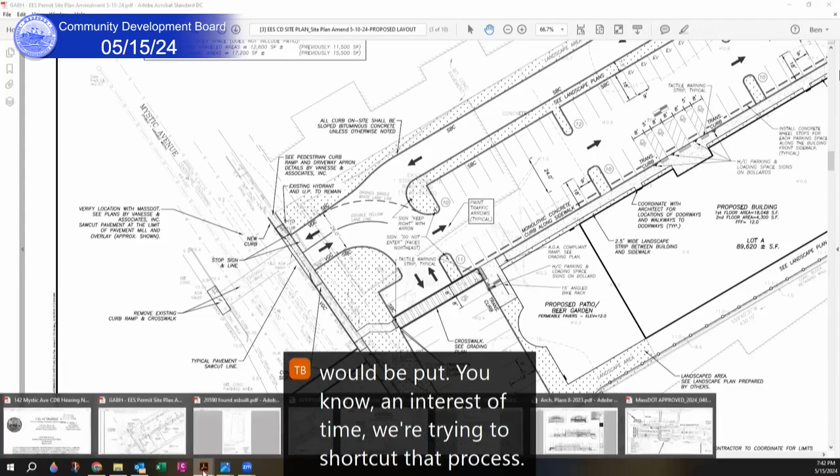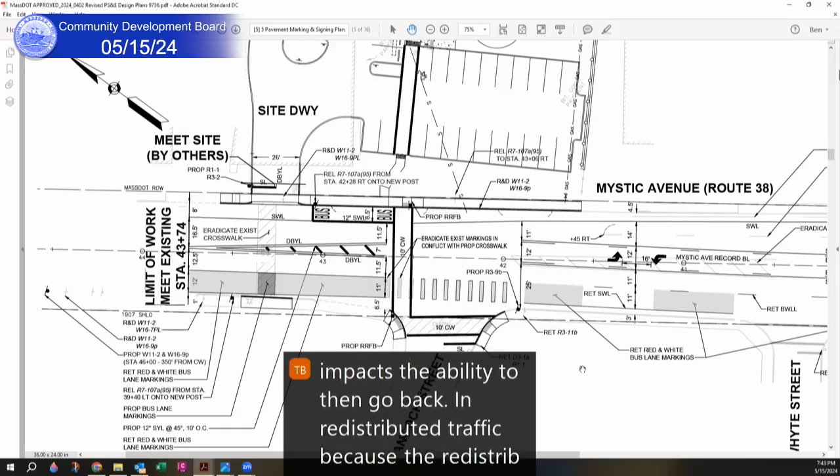Actually, if I can add, it's worth noting that in the past, in the original submission, usually any development, even this one, comes and discusses the scope of a traffic study. I had suggested more locations for the scope of this project, and the project chose to just study this one intersection closest by. That also impacts the ability to go back and redistribute the traffic, because the redistributed traffic wouldn't even go through the one study area intersection. If it had included other intersections, you might be able to reuse some of the data and readjust the trip assignments.

Before I open it up to the public for comment, are there any other questions from the board?

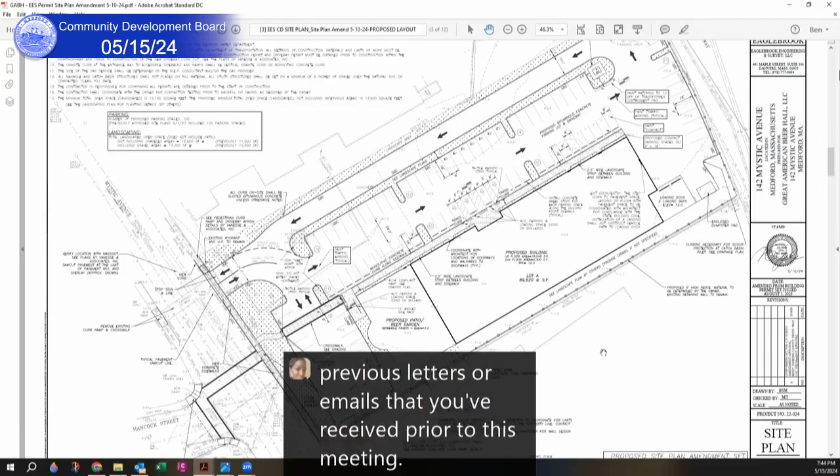Madam Chair, I do not see any members of the public with raised hands, and I have not received any comment letters.

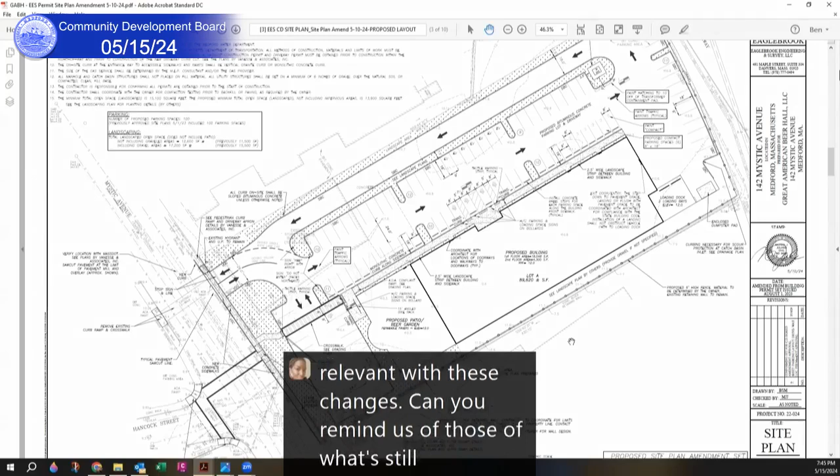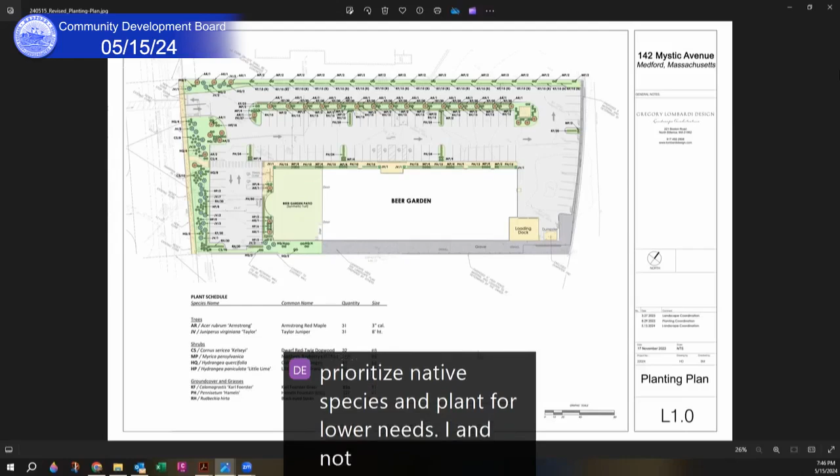Yeah, so the control plans will be amended. The other conditions that were in there—the ones that are still relevant—I have not checked the landscaping plans to see if those plants are considered drought tolerant. But there's a condition to prioritize native species and plants with lower water needs. I don't have a green thumb, so I couldn't tell you if these comply with that. So I would keep that condition.

The conditions for the wayfinding signage would be modified. One of the conditions is—and I could share my screen at this point to go over these, that'll just make it easier. Let's see here. Let's make sure. So.

Number 7 was applicant to furnish and install wayfinding signage and parking aisle markings, enforcing one-way circulation through the northern parking lot. We would want to revise that.

Currently, there's a sign that says keep right, but I think it may benefit from having a do not enter sign there as well, so that when folks are entering, they don't shoot straight and then collide with a car. So in addition to the keep right, I think we should augment the wayfinding with a do not enter.